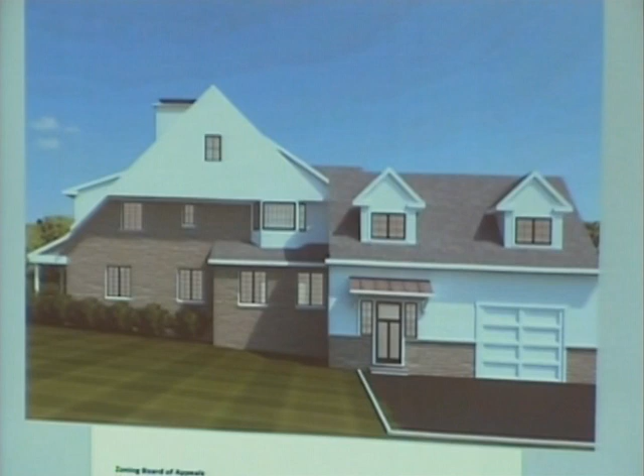So we said if we have 1 space in the new garage, and then we're proposing a 30-foot curb cut, so that we can accommodate 3 cars outside. That would be 4 cars, because off-street parking is oftentimes hard to come by, and we don't want to lose too many spaces. So that was kind of the rationale for having a wider curb cut there.

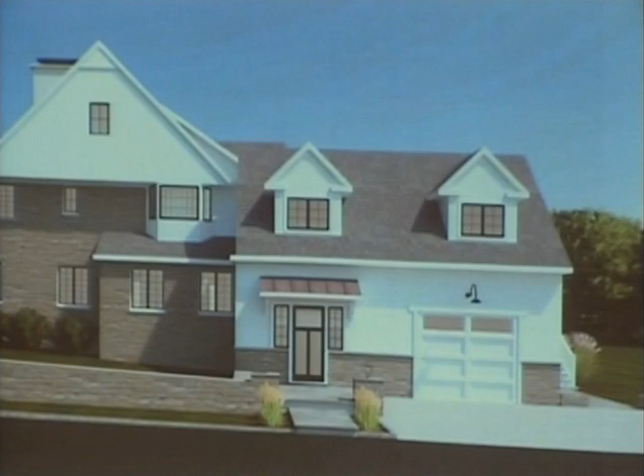And then this Middle Road here is at the dead end, directly after this driveway here. So we weren't overly concerned about too much traffic or the aesthetic or the view from that street because it's not traveled down.

And so in terms of the parking that would be situated, our 1 required parking space would be situated indoors in the garage. And then, like I said, the rear current driveway would be eliminated.

So at the end of the day, as a net, we would be actually decreasing the amount of coverage, or decreasing the amount of impervious on the property by about 1,000 square feet. We would also be increasing the amount of open space on the property by about roughly 1,000 square feet, which is a good thing. However, we would be increasing the amount of coverage by about 800 square feet.

However, the existing amount of coverage is already over the allotment of 22.5%. So after the project is said and done, we would be increasing the total coverage, and we'd be going to 33.6% from about 28.4% existing.

So that's one variance that we're seeking. The curb cut is the other variance that we're seeking, and the setback for this garage structure here is another variance that we are seeking. The proposed is 10.25 feet setback to the Middle Road property line, and the requirement is 30 feet.

And so drainage is required, new stormwater drainage systems are required for any net increase in impervious surfaces. So even though we are at a significant decrease, we are still proposing to install a new stormwater management system in the rear yard, because that is the primary goal of this project, is to help alleviate the concerns of flooding. So even though there is a system in the front yard currently that takes care of some or all of the existing roof areas through downspouts and underground piping to this existing system, we designed a preliminary system here in the rear yard that would handle the additional roof areas that are being brought about from this addition project.

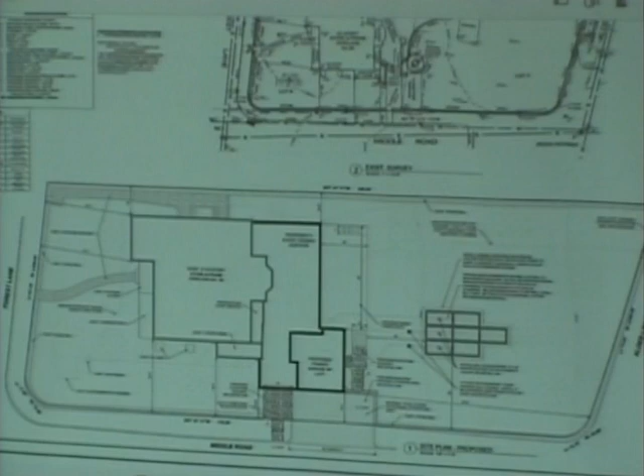And then last to note, we would be sealing up the existing driveway entrance here in the back with this stone wall. And this grade would be infilled so that we can hope to raise the level in the backyard a little bit, so that these new stormwater chambers would have a chance to be up a little higher and not as close to groundwater, because that's also an issue that we see in this property.

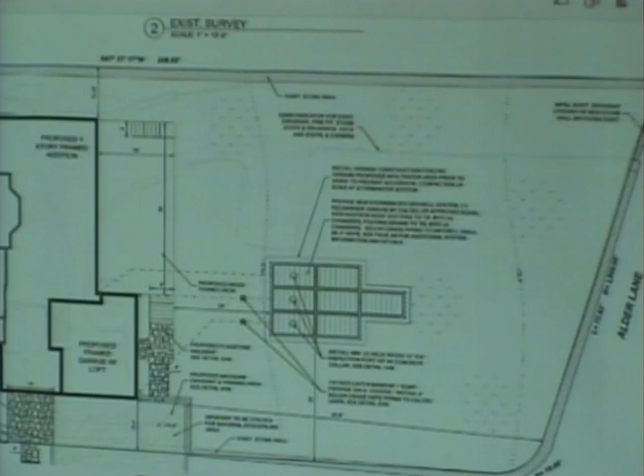So that's pretty much the rationale behind the design that we came up with. We think the aesthetic also fits within the character of the existing home and the neighborhood. We tried to stay in line with the same materials, same colors, same windows, but give it a little more flair. In the rear, we have a series of renderings, if you want to pull those up, Paul, to talk about the architecture.

So as I was saying, we're fitting within the current scheme or aesthetic of the home. The top image is the existing rear of the property. This is the current garage back there, so we'd be looking to infill this driveway. The addition, situated in front of it, would be the family room with a deck off of that, on a grade that comes up roughly one to two feet. And then this is the new garage structure here. Overall, we think the design aesthetic complements the existing house pretty well.

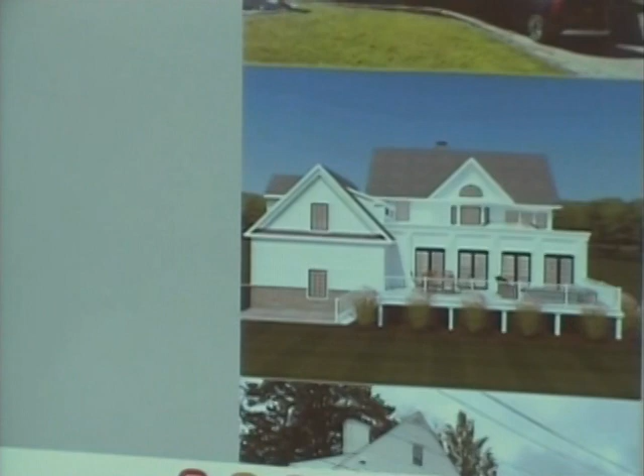One question - the new driveway, the 30-foot driveway including the curb cut, what's the surface going to be, or what's the intention? We originally planned to just do asphalt, but we'd be open to discussion if you thought there was a better material, such as a permeable paver or something of that nature. Well, that's sort of what I'm driving at - if we're trying to remediate flood issues, it might be better to have a permeable surface in your driveway than asphalt or something impermeable.

I think that's a good point. What would be those options, do you think? Gravel, or a permeable paver that readily absorbs water rather than creating more runoff into the street. The rear driveway is gravel, so they might not be opposed to gravel. Sometimes people are anxious about gravel because it tracks into the house and other negative aspects, or the difficulty plowing and taking care of it, but because they're used to gravel, that could also be considered.

What becomes of the old garage? I'm just curious - do you just close it off? So the addition would be situated in front of that. The old garage, I think we have on paper, becomes a gym, a fitness room. Oh, that's part of the new addition then. Yeah, I think I saw that.

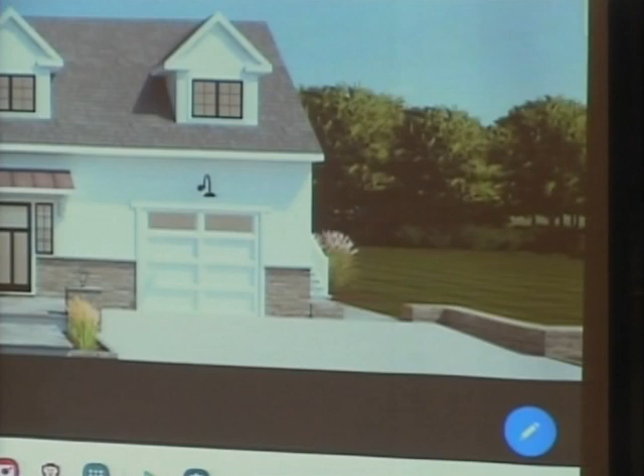That's how we derived our front yard setback, saying let's put a car there, and then we can work our way back with the garage dimensions. And Paul, that's the reason this does not trigger another variance, because it's within 20 feet of the garage, the length of the driveway, correct?

Correct. Also, this is considered 2 front yards, but it's not really 2 front yards. Even though it's a dead end street, we can see it's the side, so we don't have as big a concern. It's kind of a bizarre way of characterizing the front yard in this village, really not a front yard.

Yeah. I have 3 of them too. We'll see that in the next one, I think. Right.

And just out of curiosity, this drainage system that you're installing, in layman's terms, how does that work? Are you pumping the water somewhere else? For the Cultec system, keep in mind this is a preliminary design. We will be engaging with a civil engineer to design the final system, and that is a whole separate review with Paul and AJ. But in layman's terms, it would be a system that stores water and lets it slowly dissipate into the ground over time.

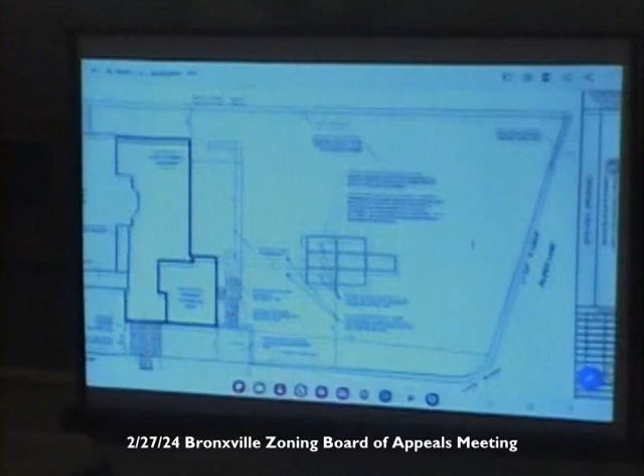You can see some of these contour lines here. This is 174, and this is 172. These are some of the existing contours. We're taking this line and dragging it down this way, and then the 174 we're dragging where the 172 is, so we're shifting the pitch of the backyard a little bit. That's to help fight some of the rising water levels, but also give us more soil depth where the stormwater system is going to be located, so we're not too close to groundwater, so the system can perform better than sitting in groundwater all the time.

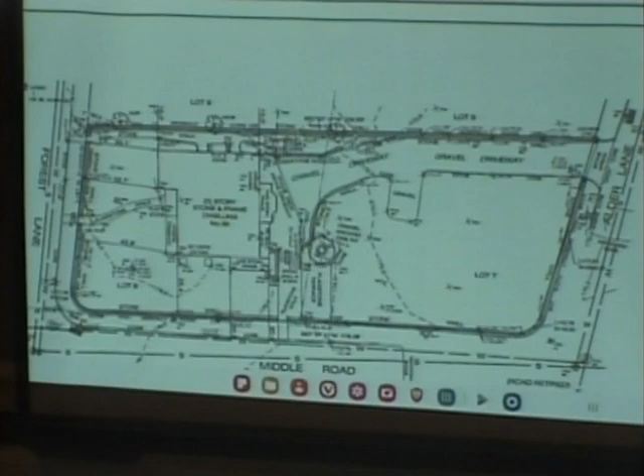Paul, I would assume that part of the project is really to be reviewed by AJ and you, that's not zoning. Yes. Okay, you're just bringing that to our attention. I would bring that to AJ, and we discussed that already. Right, so I just wanted to bring that to your attention.

I'm not sure this is relevant to the variance, but are you intending to landscape the backyard or plant trees or gardens? That also helps to absorb some of the water, so there's a practical reason for that too.

Let me propose a resolution that the Zoning Board of Appeals grant to the residents of 30 Forest Lane the following variances. Section 310-10D, corner lot, required 30 feet, existing 20.4 feet, proposed 10.25, variance required 19.75 feet. Section 310-10E, building coverage, required 22.5%, existing 28.4%, proposed 33.6%, variance required 11.1%, or 1,736 square feet.

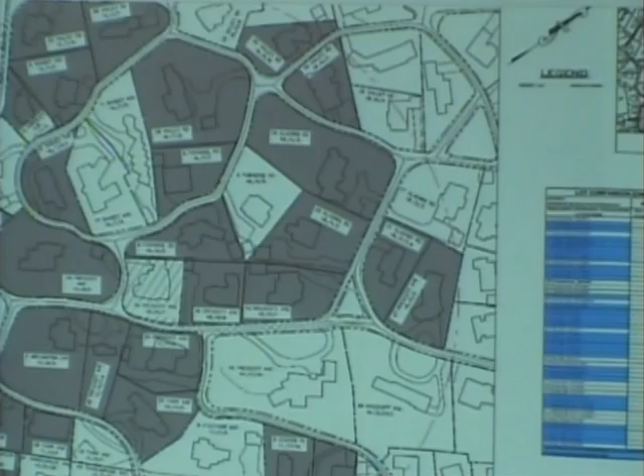As you know, it can be assumed that- sorry, I lost my train of thought. We did a study within a 500-foot radius of all properties near 35 Prescott, and we found that over 64% of these properties have non-compliant driveways, meaning in excess of 16 feet. We can assume that since the street parking is so limited, it's contributed to so many properties being non-compliant.

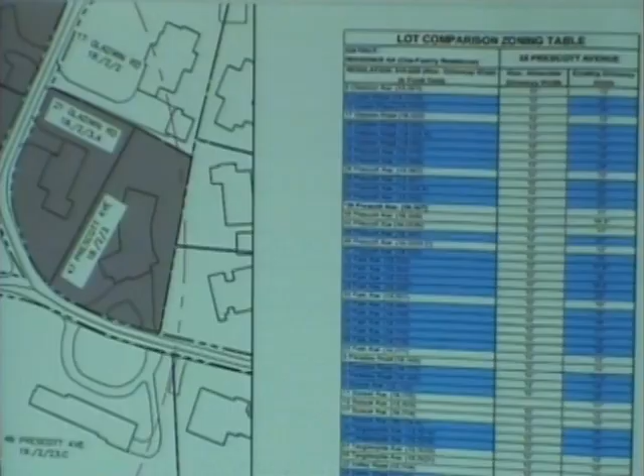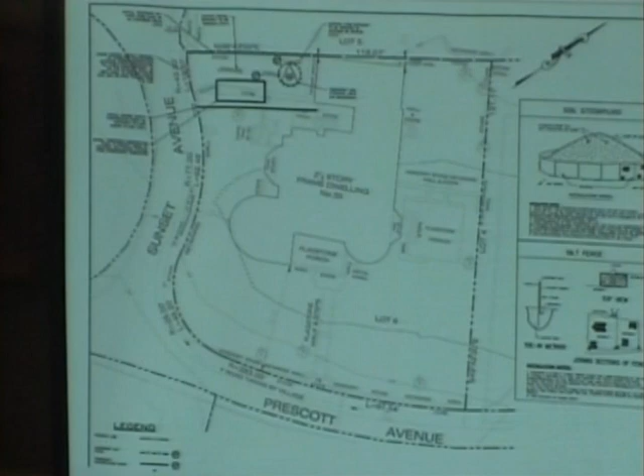We do not believe that the requested variance is substantial, as the existing driveway is already 18 feet in width. We're only seeking to widen the narrow area that does not allow two vehicles to simultaneously maneuver in and out of the driveway. In addition to reducing the need for street parking on Prescott with the widening of the driveway, we are also including a stormwater system capable of handling the runoff from the newly widened driveway and the roof area for the existing garage. This new stormwater system is capable of handling the village-required 50-year storm, but is over-designed to also handle up to the 100-year storm, so it's more than capable of what is required.

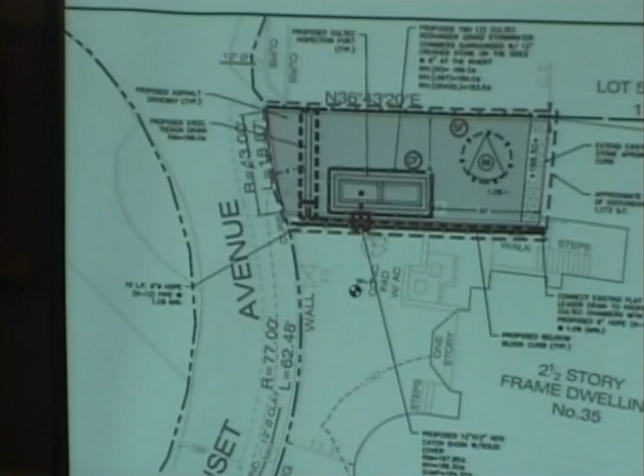If you guys have any questions. Well, if you were here earlier, you probably know where I'm going with this. I did go over to your house, beautiful house by the way, and I noticed that the current driveway is cinder or pebbles? Gravel. Gravel, okay. Is it possible, as we discussed in the last one, to consider a permeable surface, or is there a reason you can't do that in this case?

So the thing with permeable driveways, maintenance is difficult, and oftentimes homeowners don't really pay attention to that, and in the wintertime it can get clogged. It's not very easy to maintain.

With the asphalt driveway, there's going to be a trench drain at the end which will collect all the runoff. So we're actually improving that condition. Right now, there is nothing collecting any runoff from that driveway. With the new driveway, everything is going to be collected at that trench drain, and discharged to the Cultec system we're proposing underneath the driveway.

The advantage of an asphalt driveway is that it's much easier to maintain and easier for the homeowner to use. I'll comment that we get a lot more rain these days than we do snow.

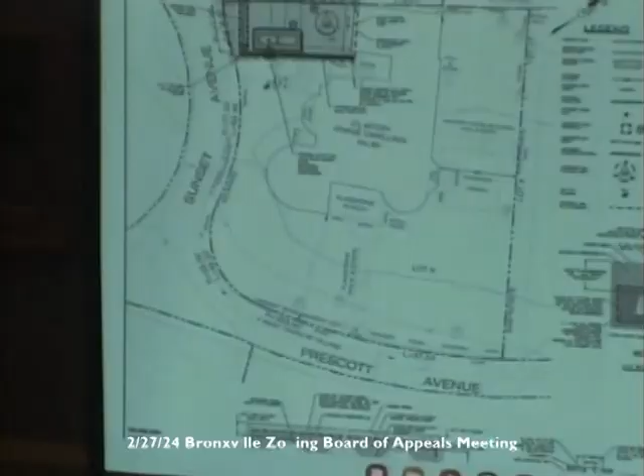And where does that water go once it goes down that drain? The trench drain, as shown on sheet C2, is piped. There's a concrete sump box on the end, which has a 6-inch pipe that goes to another structure which acts as a junction point. You can use it to clean out the system and maintain it over the seasons, and then from there it goes into two underground infiltration chambers.

They're Cultec, like the gentleman in the last presentation said, we're using the same system. Self-contained on the property? Yes, sir, it's self-contained.

So let's talk about this maintenance, because it didn't seem to be a problem with the other applicant, it didn't even come up. This is a big issue for the village. Now, you might say it's a little small driveway, what's the big deal? But one of the issues we're facing is that there are going to be other applications coming, so we have to look at the precedent here.

So let me ask the question again. Maybe there's some additional cost with maintenance, but do you have an issue with working with the village to put a permeable driveway in there? Because that's what you have right now.

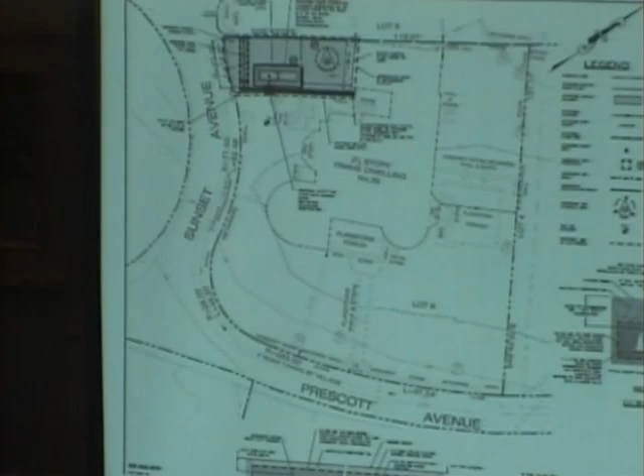I think overall it's a preference to have an asphalt driveway. I know maintenance is secondary, or it's the preference of the village to have permeable driveways, but again, there really is no advantage as far as stormwater. I'm just trying to understand the reason to have a permeable surface over an impervious surface. Is it just the preference of the village, or is it more to deal with stormwater?

That's it, exactly. So what you're trying to say is between the drainage and the asphalt, you'll end up in the same place as if you had a permeable surface, with as little flooding in the neighborhood and on the property. The biggest reason to not have a permeable surface is the upkeep.

That is really the biggest thing. With asphalt, it's pretty easy to maintain—you're salting, you're removing snow during the wintertime—and with the stormwater system we're proposing, we are more than handling the stormwater requirements posed by the village.

If there was a drainage problem with asphalt, this will solve it. That's why we have over-designed the system.

It's more than just what the village requires. We're going above and beyond what the village is requiring for a stormwater system, because we are well aware of the village's concerns about flooding in that area, and that's why we've tried to address that concern by over-engineering the stormwater system. Again, it's really a preference, but the ease of maintenance is really the reason we're proposing impervious.

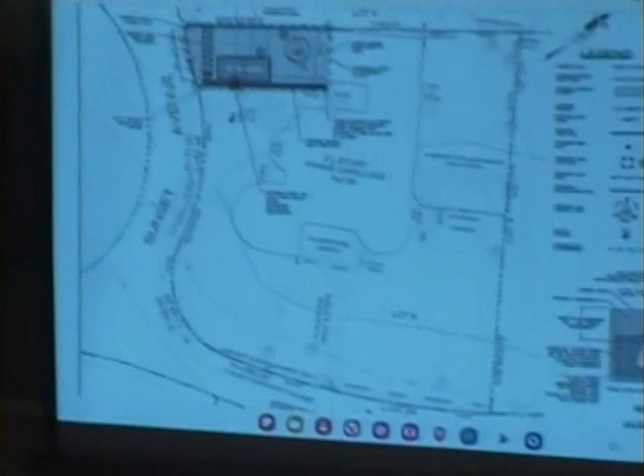What we've started to do in the village with these systems, the Cultecs, is require a 2-foot deep sump pit prior to the stormwater going into the Cultec. So any stormwater coming in that might have debris, the debris drops to the bottom and that can be maintained, so they don't get all clogged. Whereas just a few years ago, we would not have required that, and we're even seeing some systems that might be 10 years old that are clogged up because of that.

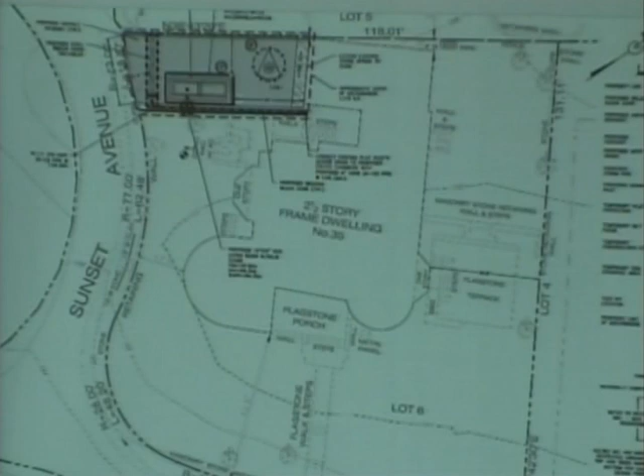So that's a big improvement. We're requiring 12 inches of gravel under the dry well of the Cultec instead of just 6 inches, so that adds more storage as well. We're trying to make some improvements for the village. I think he does have good perk, and you're looking at 2 different systems, so that's about all I can add.

Okay, so it sounds a little technical, I know, but Paul, so what you're saying is what they're saying, you tested already to see that there is good drainage?

The town already tested it twice, it sounds like. Yeah, it's called a perk test. They'll dig down a 4 or 6-inch hole, and correct me if I'm wrong, Nick.

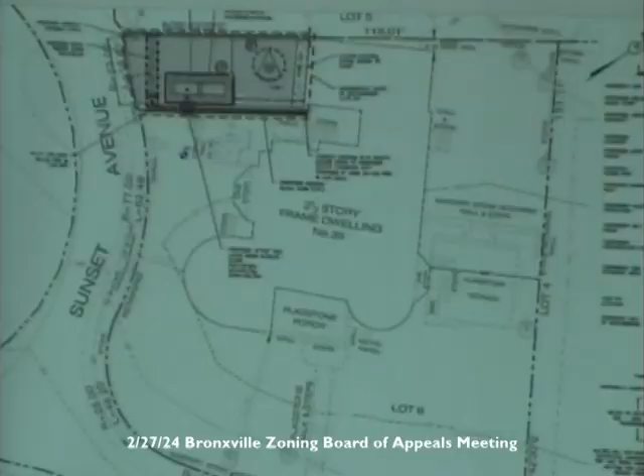Then they'll fill that with water to a certain level and measure how long that takes to go down. And then they do their calculations, and base the system on that. We did that twice on this property. Yes, and sorry, we're very conservative with our numbers.

For this design, we had a perk rate of 20 inches per hour, but I believe the rate we're using is 15. We've cut that significantly to take into consideration any factors that might hinder the percolation during a severe rainstorm.

And as Paul alluded to, we are providing that clean-out structure next to the Cultecs, which is just a method of making it easier for the homeowner. You can walk around any house, any street, and see how clogged catch basins get. It's because no one goes around and maintains them, and they become useless. They actually cause flooding. So with this it's so much easier to maintain.

You have your landscaper stick a vacuum in there, and they'll suck up all the sediment and leaves that have accumulated at the bottom. The system is ready to go for another 6 months.

With something like a permeable surface, it's just a lot more involved. If you're using salt during the winter, it can clog that area, and then it's no good. You'll have to basically get it redone. So there's a lot of negative aspects to using permeable asphalt, which is why we're leaning towards the impervious asphalt, which is pretty standard in that neighborhood as well.